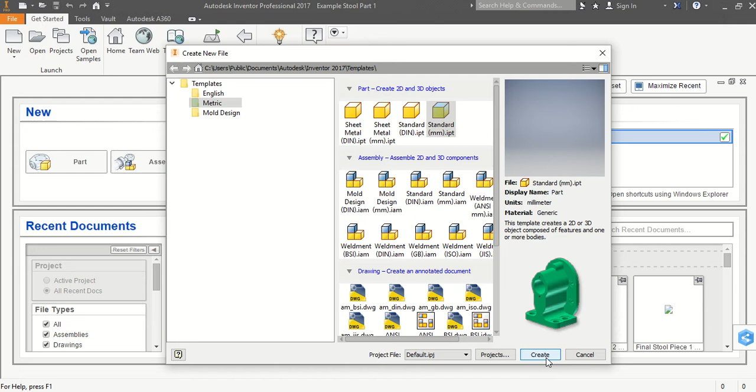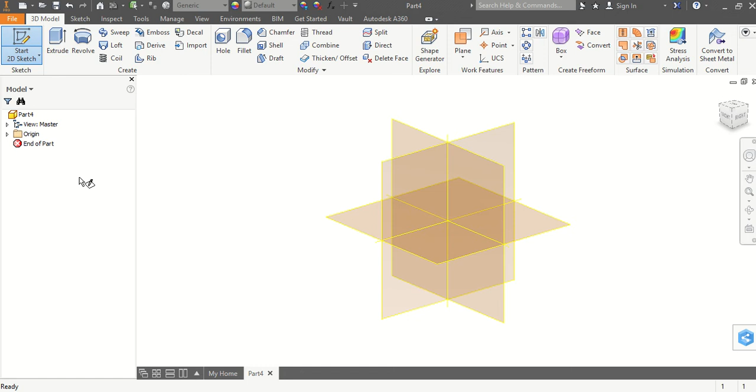What we are going to do is basically create a 2D sketch of a part of the stool, and then we're going to extrude it so it's got a thickness just like the cardboard does of 5 millimeters. So to do that we need to go to the top left, and we're going to start a 2D sketch by left clicking here. As we go through this, we need to make sure that we are always on just the one 2D sketch rather than multiple sketches, because otherwise we won't be able to extrude afterwards.

First thing we need to do is select a plane. You can choose any of these, but I'm going to choose the YZ because I think it's going to be easier for this part. So you can left click on that once it's selected. A center point will come up here. You can at all times use the pan tool on the right hand side of the toolbar just to move around the screen.

What we need to do first of all is just double check we've got one sketch on the left hand side. So we're currently on sketch 1, which is good. If at any moment you're unsure how many sketches there are, just refer to the left hand side column and you should be able to check.

We need to start drawing out the part now, so we're going to go to the line tool, and we're going to left click on this at the top, and we can left click just on the center point, and you'll notice we can draw a line wherever we want. We are going to make a part of the stool which is 500 millimeters in width, and we need to make sure there's a 5 millimeter halving joint in the middle of it. So we are going to take 5 away from 500, and we're going to end up with 247.5. So we need to draw a line which is 247.5 millimeters.

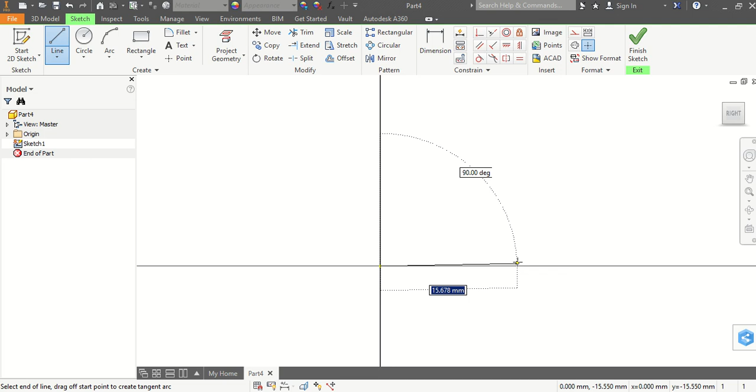The way we're going to do that is we're just going to make sure that we're going at 90 degrees here, and we're going to type in 247.5, and then we can just press enter. That will now have a line which is 247.5 millimeters in length. What we need to do, however, is we can't actually see the whole of the line, so we need to either use the pan tool, but even easier, just below it, we can use this magnifying glass tool, and we can left click on it and press zoom all, and that will show the whole line in view. It's quite a useful tool as we go through.

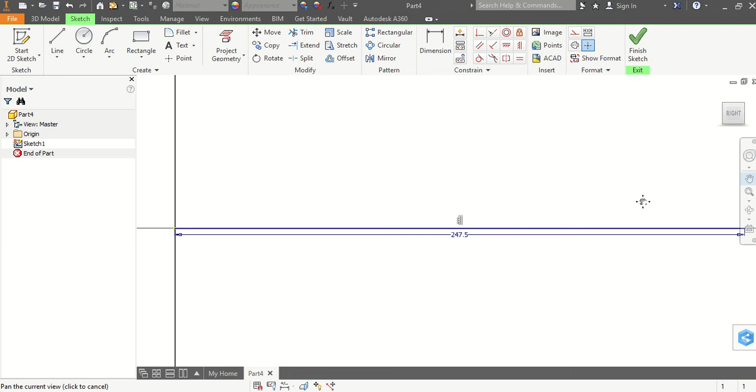What we need to do next is create a 5 millimeter kind of halving joint in the part. So the way we're going to do this, we can just pan across, and we're going to left click on line tool again, and make sure that it attaches on the end. It should be green, and we can draw up at 90 degrees, and we want it to be to half of the height of the stool.

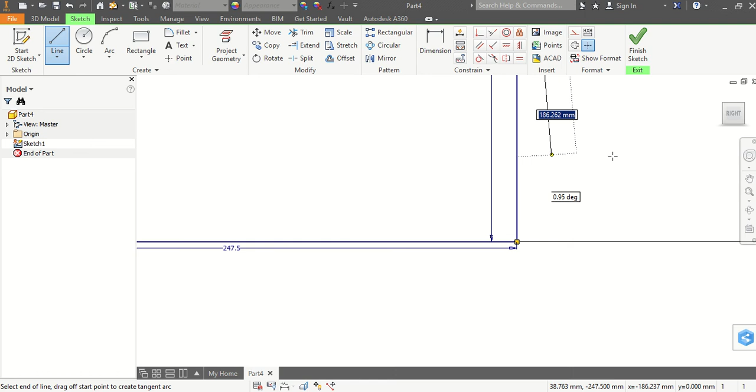That is going to be 450 millimeters high. I'm going to say the stool is going to be, so we're going to go 225 millimeters in height. 225, we can type that in, and we can press enter. Once again, we can use the zoom all to double check that we've got everything in view.

Now I need a 5 millimeter thickness, so we're going to go across just like we have done, once again at 90 degrees, type in 5, and we're going to press enter. We've then got our line across. Then we need to bring this halving joint back down here, so bring it right down to the bottom, just double check it's 225, it should be, to make sure that the line is straight, again at 90 degrees, and then we can left click down here to ensure that we got our line.

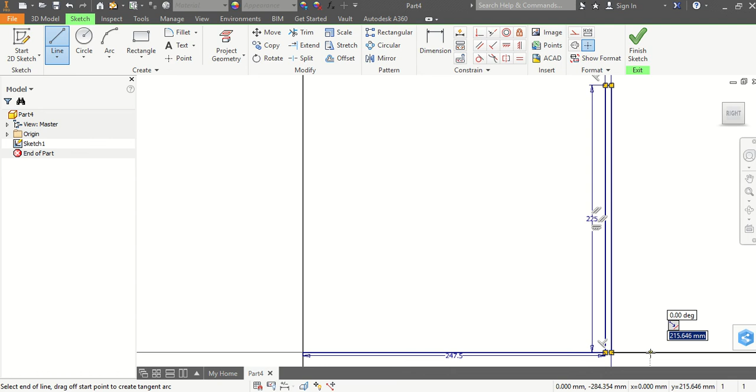Just to make sure that we got the other 247.5 millimeter line, so that we get the whole width of the stool kind of part, we need to do another 247.5 millimeter line. So we're going to go 247.5, make sure it's at 90 degrees, press enter. That should be the base of the stool part done. So if we just do zoom all, we can double check that that's all there. If you press escape, you'll deselect that line, and you'll notice that we've got the bottom part.

We now need to think about the height of the stool part, okay? So once again, we go to the line tool. We're going to go to this point here, make sure it's green so it's attaching. And we're going to go 450 millimeters in height. So we need to type in 450, make sure it's at 90 degrees to the base, and we can press enter. Once again, we can press zoom all, and we should be able to see the majority of that part coming together now.

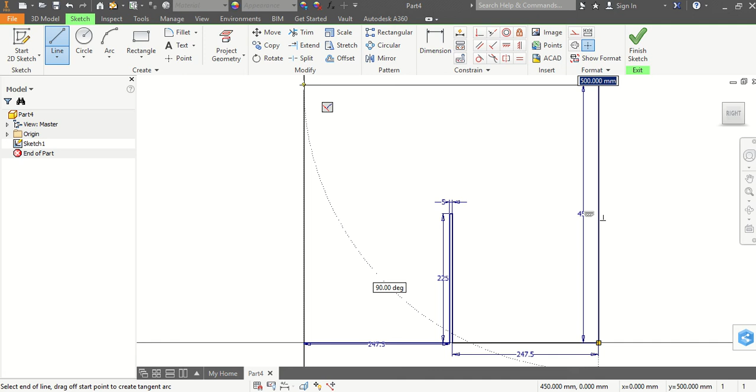We need to bring this width again, the actual width of the part, so it's 500. It should all line up, but just double check that the numbers are correct. And then you can left click in that corner.

And bring the last one down here. If we press escape, we now have that whole part there, which is just what we want.

Just like the one in the example in the booklet, I'm just going to create a bit of an arc on both sides, and I'm just going to show you how to do that quickly.

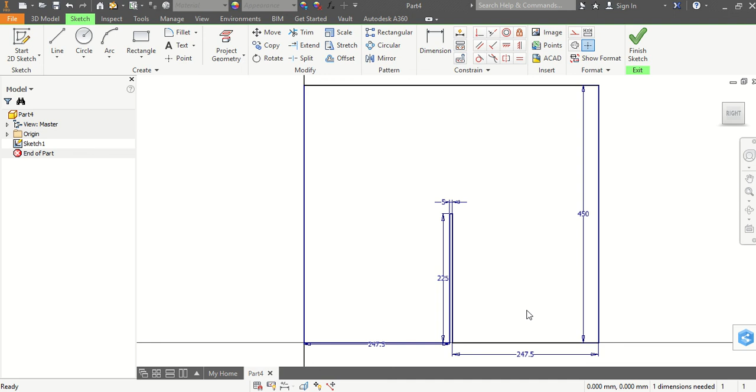So we're going to go to the arc tool here. There are 3 options if you look at the drop down, and make sure that you are on the 3 point one. We're just going to go to this point up here.

Just left click once, and drag down, left click again at the bottom, and then you'll notice you can create whatever arc you want. To make sure it's equidistant on both sides, you should be able to notice that there are some kind of dots in between the dashes.

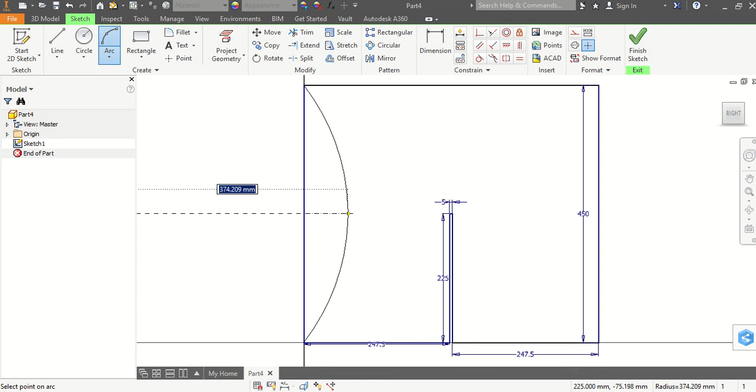I'm just going to go for a distance of 350. This is just for demonstration, and we're going to press enter, and that's an arc right there.

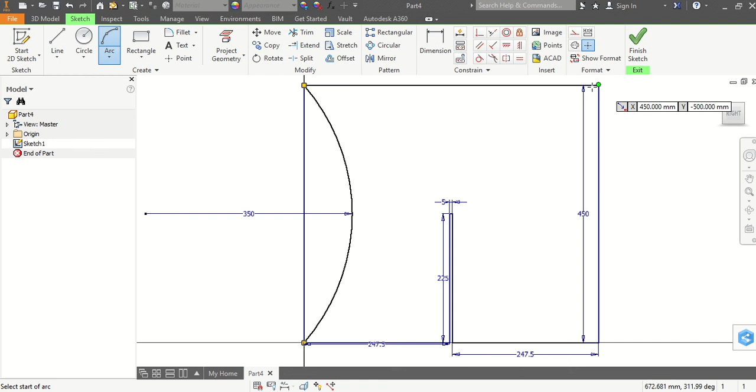To ensure that we've got the exact same thing on the other side, we're going to left click up here where it's green, make sure it attaches, and make sure it's on the same arc tool, the 3-point one.

We're going to left click on that, and then we're going to drag down, left click on this one, and again you'll notice if it's in line because there'll be lots of small dots.

We're just going to go for 350 again, and we're going to press enter. Press escape now. That should be our sketch.

There is one slight problem with it in that we've still got these lines on the side here. So what we need to do is delete those.

Sometimes when you want to delete and trim a line, you might encounter a problem that there's a dimension in the way. So if we go to trim at the top here, left click on that. If I try and delete this dimension, this line here, it's absolutely fine, it lets me delete it.

If I want to delete this one, it encounters a bit of a problem in that there's a dimension in the way and we can't trim that line like we want to.

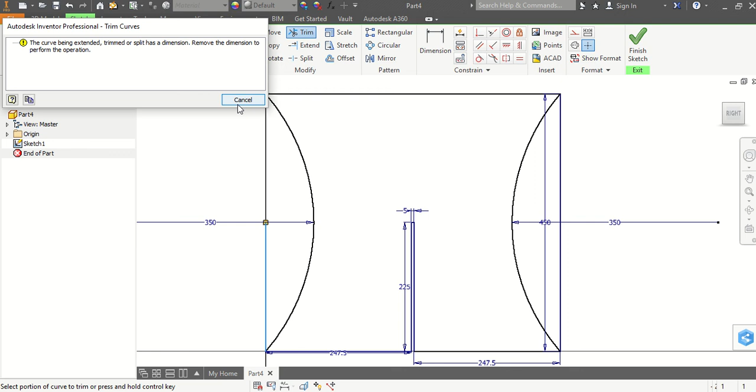So a simple fix to that, just press cancel on that. And we can press escape, so we're not selecting anything. We can just left click and then press delete on any dimensions you think might interfere with trimming the lines. I'm just going to do these as well. You can always get these dimensions back again later.

Then it should be easier to trim the line, which is what we are after. So we go back to trim, we should be able to delete this one now. There we go. And the same up here, and the same up here.

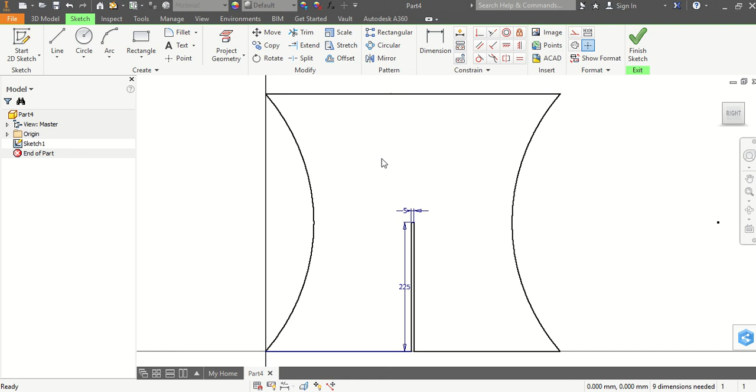Press escape, and we should have our final shape here, so that looks pretty good.

We're going to go finish sketch, and just press zoom all. If at any point you accidentally press finish sketch and you get to this kind of scenario where it's not flat...

You can just double click on your sketch on the left hand side and it should bring it back up again just like that. So we're going to go finish sketch.

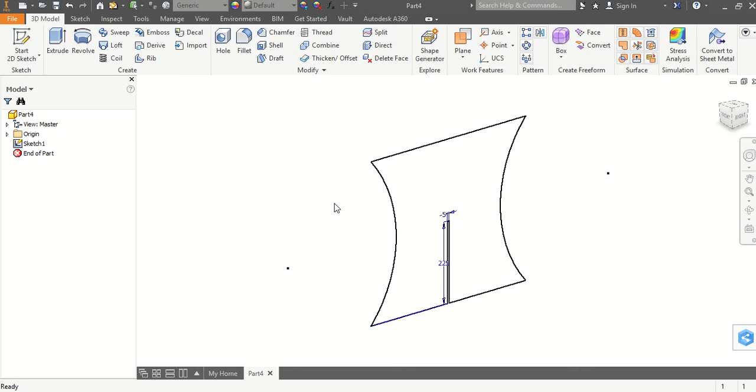Now that we've actually got our 2D sketch, we need to create a thickness on it, just like it would be as our cardboard stool. So we're going to go to extrude at the top, and then it will automatically extrude by a certain amount.

I think the default is 10 millimeters, but we want ours to be 5. So we're just going to put 5 in there, and we can press OK.

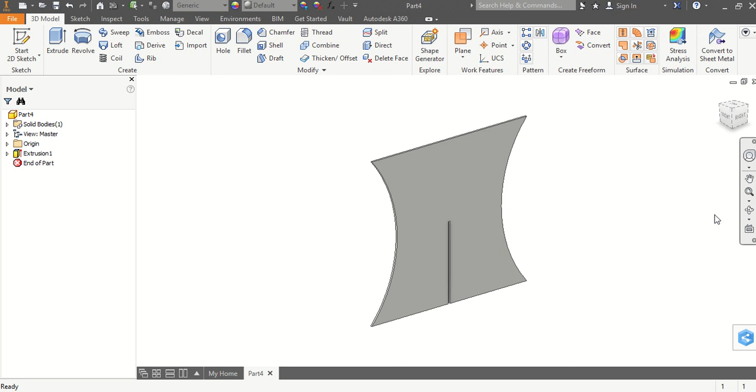Now that is currently our part. What we might want to do, the reason I chose that plane at the beginning is because it allows us to kind of see our part in isometric. But using this tool here, you can select any of the angles you want.

You can select any angle as a home. So if I go back to the isometric one that it was on by default, and I right click on this little house button, I can go set current view as home, and I can go fixed distance.

Every single time I click on any of these, if I then press home, it should bring it back to the original, just like that. So that's pretty much one part.

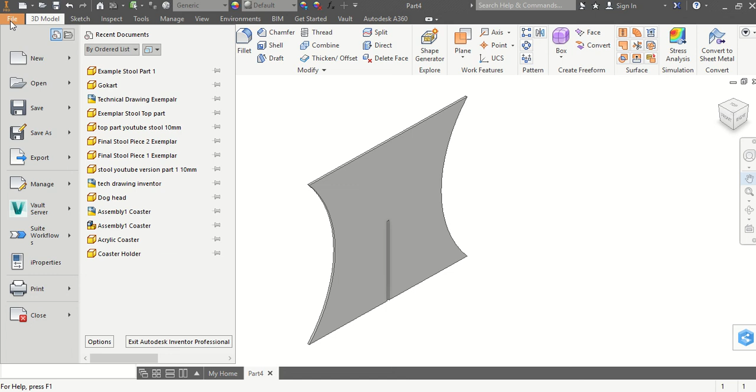And what you will want to do with that is you will want to go File, Save As, and I'm just going to save this as Example Stool Part 1, and just rewrite one that I've already done.

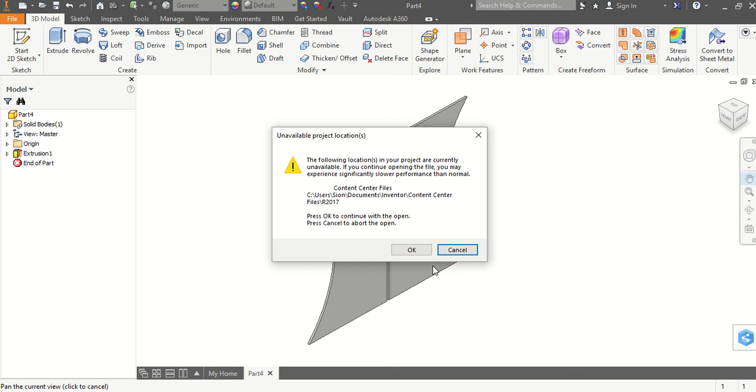Make sure it's saved somewhere you can access it, because you will need that for the second part when you turn it into a technical drawing. Press Save there. That should be our part complete.

And that is one part of the stool that we want. You will then want to go on and create the other parts before we can add them all into a technical drawing.